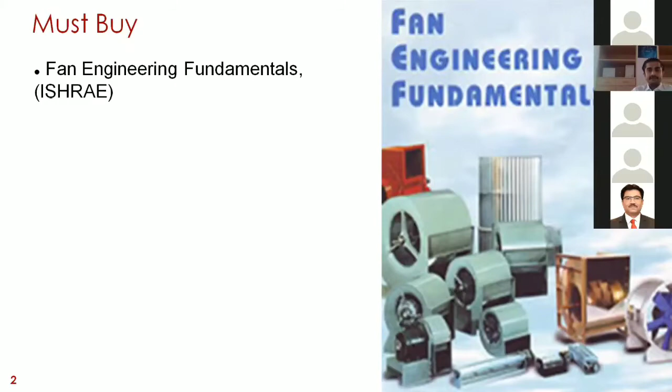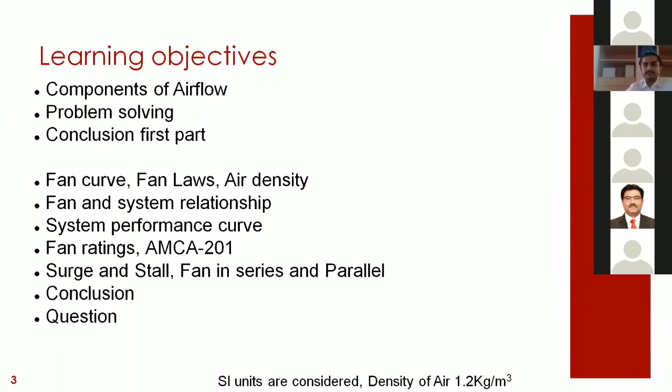So the learning objective throughout the webinar will be the components of airflow. One of the problems available within this book, I will try to solve here, so keep ready with your calculator. We will understand fan curves, fan and system relationship, system performance curve, fan rating, water surge and stalls, and thereafter we will take questions. If you have any specific question, place it in the chat box. We will try to keep this session interactive.

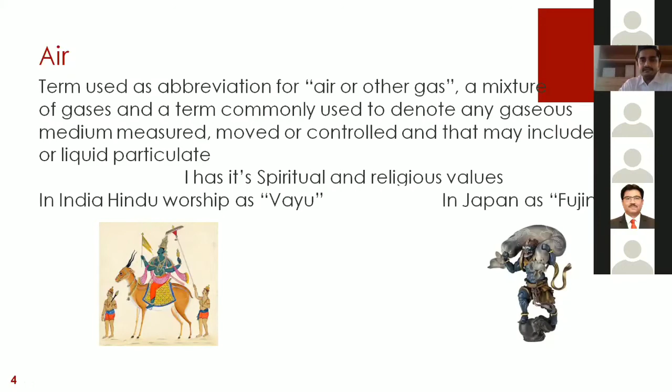So what is there - term used, abbreviation, air or other gases, a mixture of gases, a term commonly used to denote any gaseous medium measured, moved or controlled, which may include liquid particles. It also has spiritual values. In India, we named it Vayu, whereas in Japan it is referred to as Fujin.

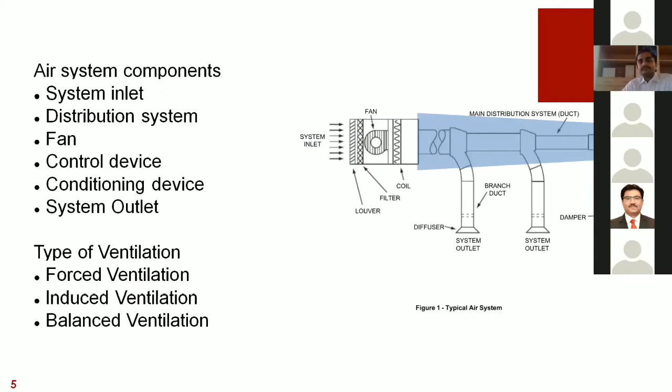So what are air system components? In HVAC, the air system components include one system inlet, a distribution system which are ducts, elbows, we have a fan placed in between, we have control devices like volume control dampers, and we have a conditioning device which will filter our air and keep the temperature low or high to the delivered area.

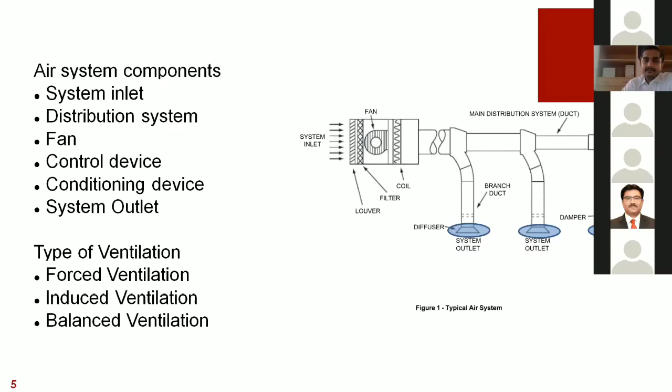There are three types of ventilation as we have all gone through - forced ventilation, induced ventilation, and balanced ventilation. We have a system outlet like grill diffusers which finally feed air into our conditioned room.

Air plus fan, a system and application area. Fan, as per AMCA specifications, is a device that uses a power driven rotating impeller or impellers to move air. The internal energy increase imparted by a fan to air is limited to 25 kilojoule per kg, approximately equivalent to a pressure of 30 kilopascal.

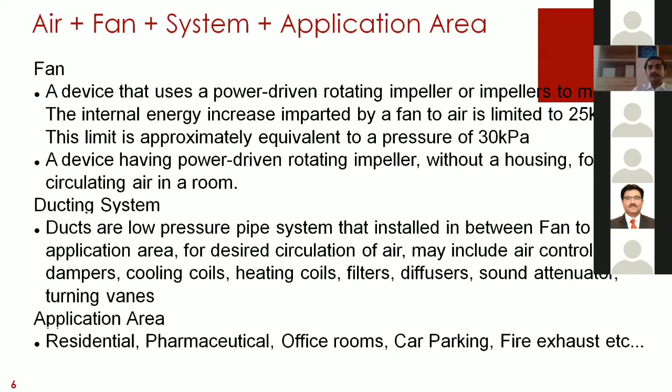Ducting system: ducts are low pressure pipe systems installed between the fan and application area for desired circulation of air. They may include air control dampers, cooling coils, heating coils, filters, diffusers, and sound attenuators. Our industry application areas are like residential, pharmaceutical, office rooms, car parking, and fire exhaust.

What are the components of air? Airflow: one is velocity of air, another is the cross-section area at the measured velocity point. As we all know, volume flow equals area into length, and here we have a velocity which is covering our length. So volume flow in airflow, denoted as Q, equals area into velocity.

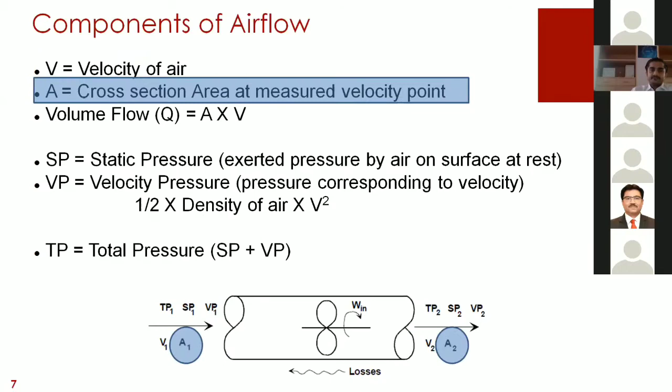Static pressure is the exerted pressure by air on the surface at rest. Velocity pressure is the pressure corresponding to velocity, with formula half into density of air multiplied by velocity square. Total pressure equals static pressure plus velocity pressure.

We have another hidden thing, which is losses. Losses are the sum of static pressure losses due to friction, shock dissipation, or velocity pressure differences between the entry and discharge opening of an air system. The system pressure losses are total pressure losses.

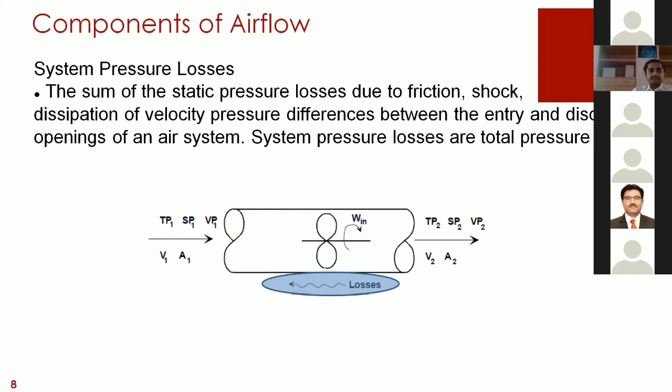So why do we need to calculate area? First, let us clarify the calculation of area. If we are measuring velocity in a rectangular cross section, then width into height is our area. If measuring through a circular cross section, then pi by 4 diameter square is our area. Generally the unit is square meter or square feet. Throughout the presentation, I will try to keep SI units because I am convenient in that.

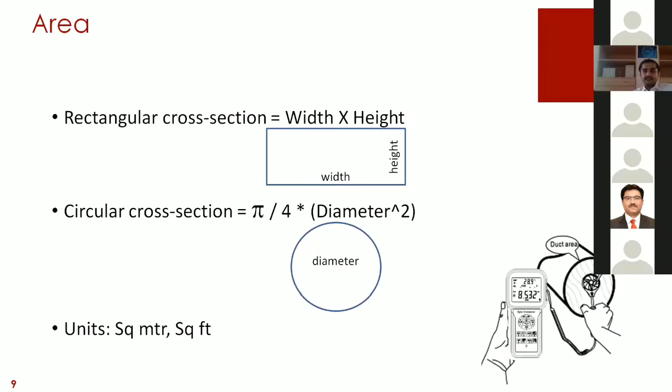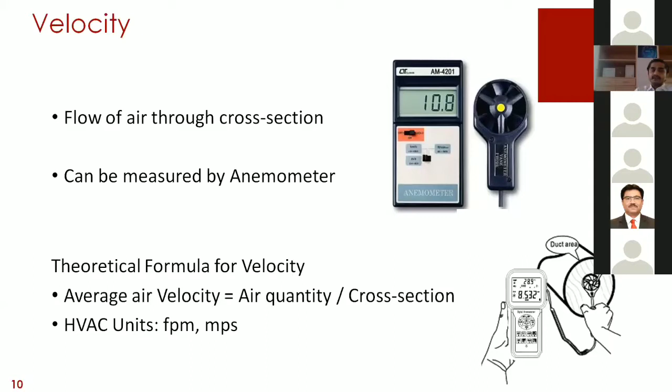So how is velocity of air measured? It is measured through an anemometer, one photograph of which I have shown here, or flow through a cross section area. Once we know the cross section, the theoretical formula is average air velocity equals air quantity divided by the cross section area. Its HVAC unit is feet per minute or meter per second, which we generally use in industry.

So how do we calculate air quantity? As described earlier, air quantity equals average air velocity multiplied by area. It comes in three different units. One is CFM, cubic feet per minute, which equals feet per minute into square feet area in the cross section we are measuring. If we have meter per second, then we multiply by the square meter area and multiply by the factor of 3600. Do we all know why 3600?

Because 1 hour equals 3600 seconds. CMS is cubic meter per second. 1 CFM equals 1.7 CMH, and 1 CMS equals 3600 CMH.

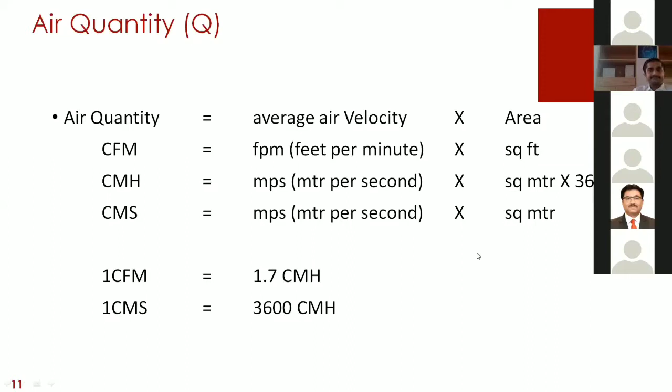So what is static pressure? Static pressure: whenever there is a flow, it's the pressure and resistance to flow, equal in all directions, can be positive or negative, independent of air velocity, measured by a pressure tap perpendicular to the airflow.

In the image you can see the measurement of static pressure in a piston arrangement. If we are not exerting any pressure on the piston, the pressure in the manometer is 0. If we exert some pressure, there will be a positive chamber reflected in our manometer, and if we pull back the piston, there will be negative pressure, which can again be visualized in our manometer. So this is static pressure.

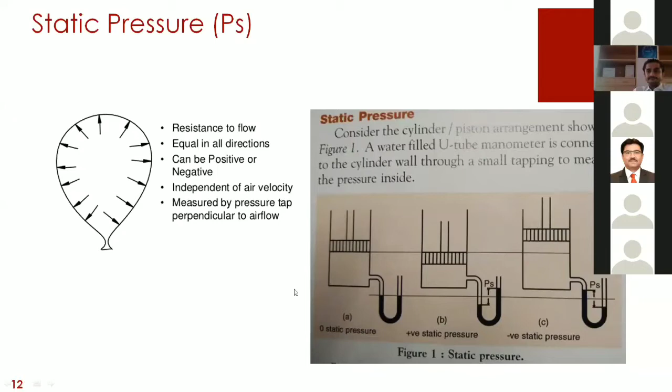Velocity pressure, as by formula, will always be positive. Velocity pressure equals 0.5 into density of air into fan outlet velocity in meter per second square, and the resultant value is in Pascal. Can anyone suggest why velocity pressure will always be positive? I'm waiting for you all.

As we all know, the square of any negative number will be positive. We had a good response because it's in the direction of flow. So in velocity pressure, by formula, it is the square of our velocity, so it will be positive always.

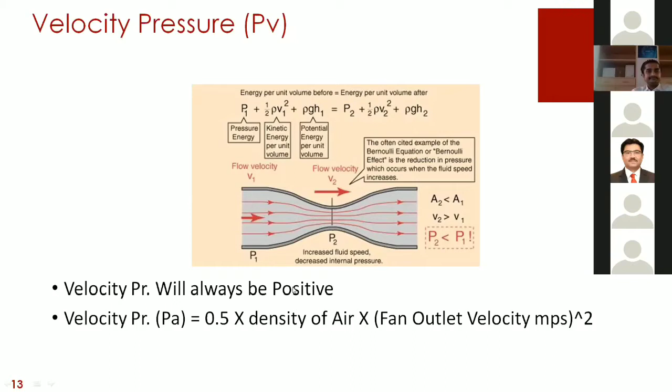Total pressure equals static pressure plus velocity pressure, by formula. In this arrangement, we can see there is a fan in between a system. There is some system resistance from the suction side, and some system resistance at the discharge side. So total pressure equals static pressure and velocity pressure.

PT equals PS plus PV. PT1, considered at inlet, will be minus because of vacuum at this side, so minus PS1, plus PV because velocity pressure will be positive. And PT2 at the fan will be plus PS2 plus PV. Its unit is inch of water gauge, which equals 25 mm water gauge, and 9.81 Pascal equals 1 mm of water gauge.

I keep one problem for you. If you have a calculator and notebook, there is one problem. Let us put some values into the system as shown in figure 2. Assume we have a duct of diameter 500 mm. For the whole duct length, average velocity within the duct is 9.9 meter per second. The duct contains system elements like filters, coils, dampers, diffusers, etc.

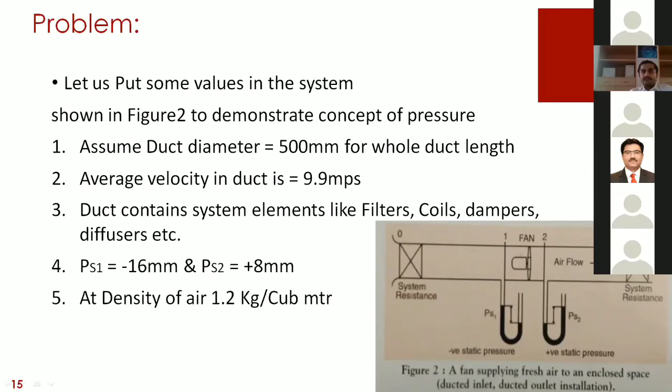PS1, the pressure at point 1, static pressure is minus 16 mm, and PS2, the pressure at the supply side, is plus 8 mm. The density of air we are keeping is 1.2 kg per meter cube. Now what we have to solve: what is the airflow, what will be the PV1 value, PV2 value, PT1 value, PT2 value, fan total pressure, fan velocity pressure, and fan static pressure.

As we are running short of time, we'll keep 3 minutes for this. You can solve it and put your answer in the chat box.

Hope you all are solving and you know how to calculate the area of a circular 500 diameter duct. 1.94 cms. Great.

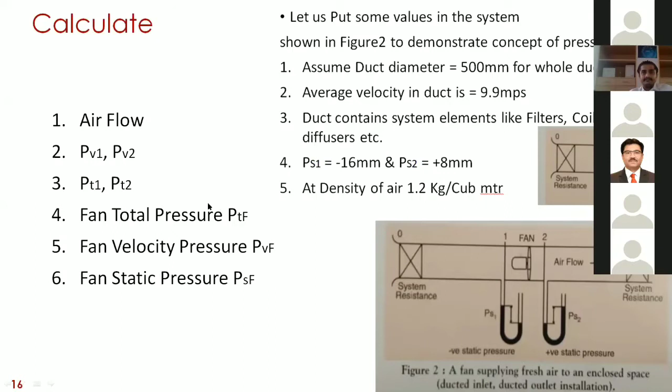So shall we move forward? Our duct area is 0.196 square meter. Great, Nirav, you got the right answer. That is 1.944 cms, which equals 7000 cmh, which will equal 4130 cfm.

Velocity pressure from the formula we can evaluate - it comes out to be 58.8 Pascal, which is 6 mm water gauge. For PT1, because we have 6 mm, so minus 16 plus 6 gives us minus 10 mm total pressure at terminal 1. At terminal 2, we get 8 plus 6, which comes out to be 14 mm. Total static pressure generated by the fan will be 18 mm, and total pressure generated by the fan will be 24 mm, because 18 plus 6 is 24 mm.

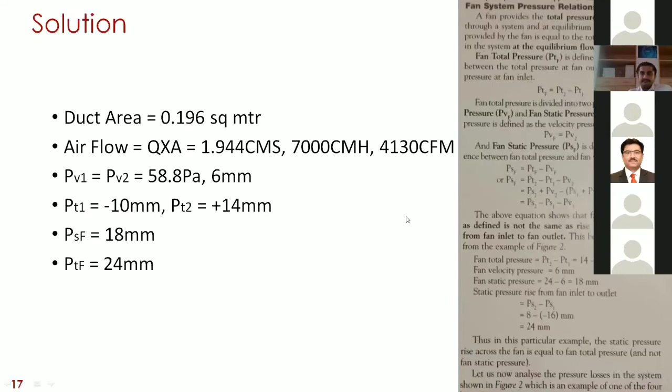So again, in components of airflow, what is fan efficiency? Efficiency of anything is output divided by input - the ratio of useful energy provided by the dynamic application to the energy supplied to the system at a specific point of operation. Total efficiency of a fan in SI units is CMS multiplied by the total pressure divided by the power consumption by the fan in watts. Or, power consumption by the fan equals CMS into total pressure divided by the fan total efficiency.

So I have created a system in which both fans are flowing 10 cubic meter per second at a static pressure of 400 Pascal, which is our system pressure drop. But velocity pressure in case 1 is 135 Pascal generated by the fan outlet, and in another case is 62 Pascal. So the total pressure is 535 and 462 in different cases.

Keeping the efficiency of both fans at 70%, there will be a drastic change in power consumption. The fan having high velocity pressure is consuming 7642 watts, and the power consumption at the low velocity pressure fan, at a velocity of 10.2 meters per second, is 6600 watts, because the duct area we calculated is 816 by 816 for the higher velocity pressure fan, and the duct area for the lower velocity pressure fan is 990.

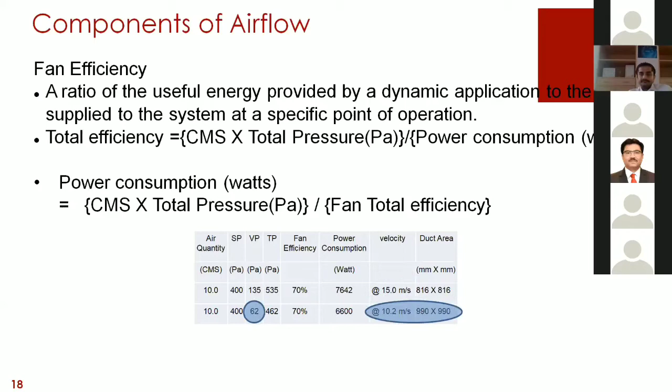There is one terminology besides fan in ducting - we can set up a static pressure regain. As we all know, velocity pressure is half the density into velocity square.

So in a system where initially the duct, or a fan, is delivering at 15.3 meter per second, by doing a transition - increasing the cross section area of the duct - the velocity is reduced to 7 meter per second, keeping an area of 0.5 and 1.1 at another end. So we can see that we have reduced our velocity pressure from 140 Pascal to 29 Pascal.

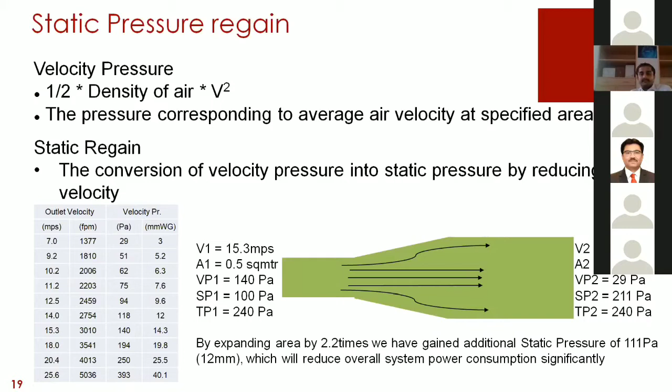Static pressure regain: initially it was 100 Pascal and we regained 211 Pascal. So the total pressure of the system remains the same, at 240 Pascal to 240 Pascal. So by expanding the area by 2.2 times, we have gained additional static pressure of 111 Pascal, which is equivalent to 12 mm water gauge, which will reduce our overall system power consumption significantly.

Conclusion so far: every flow has some velocity. Do we all agree with this? We cannot keep velocity at 0 because we need some flow.

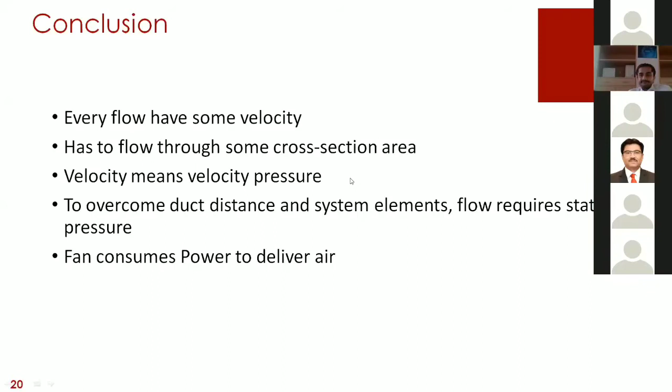So now here is the second part of the presentation. What is fan performance curve? Let us understand fans.

Fan performance curve is a graphic presentation of the performance of a fan, where one or more following characteristics may be plotted against volume airflow. At x-axis, we have kept airflow, and at y-axis we have kept static pressure and total pressure. This blue curve represents our total pressure. This pink curve represents our power consumption. Green represents fan static efficiency versus fan total efficiency.

This is at a constant density and at constant fan rotational speed.

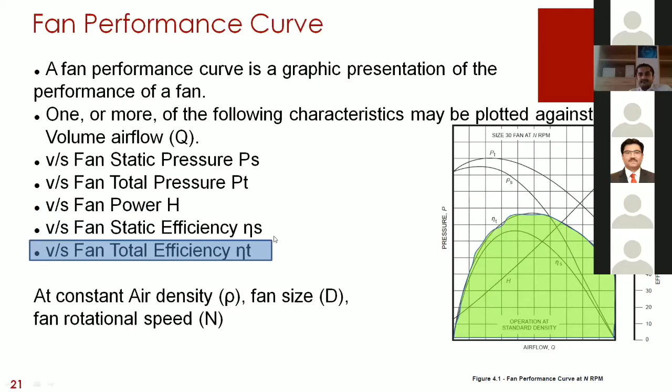So how do we evaluate our fan performance curve? We have created a system or a testing rig where we installed our fan, and at point 1 we kept a complete closed shut off point. So in the fan, there will be no flow, but a static pressure will be there.

At the second point we open our damper. Some restriction was there, we have some flow and we measured that flow with a static pressure. We plot the second point. Thereafter the third point at less restriction, fourth point at fully open. And the fifth point, which is interpolated or through an auxiliary fan, can be evaluated because the fan is mounted on some system which is also having some resistance. So this point is evaluated, or an auxiliary fan is used to generate this point at free flow.

Hope you all have understood what is fan performance curve, because this is very critical in the selection of a fan, and helps in good installation of a system.

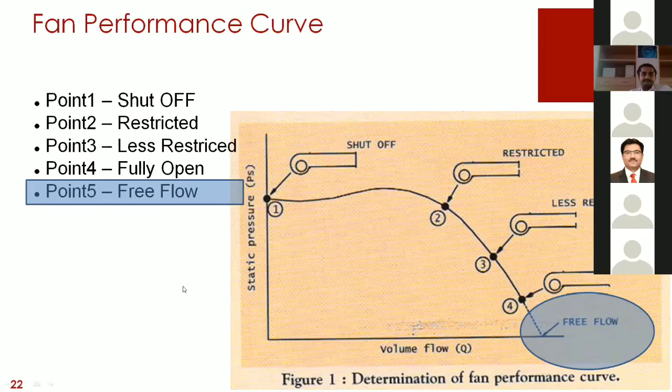Characteristics of a ventilating system. If we go into the characteristics of a ventilating system, because of the nature of the duct system and high velocities, the flow in a ventilating system is characterized as turbulent, and the pressure drop across the system element or a straight length of duct is proportional to the velocity pressure.

Pressure losses in a duct are proportional to the velocity pressure. So delta P is directly proportional to PV, which we keep equal to K equals to PV. And as we have now learned, the formula of PV, velocity pressure, is 0.5 times the density into velocity square. So our requirement of system pressure is directly proportional to the square of the velocity we are feeding into it.

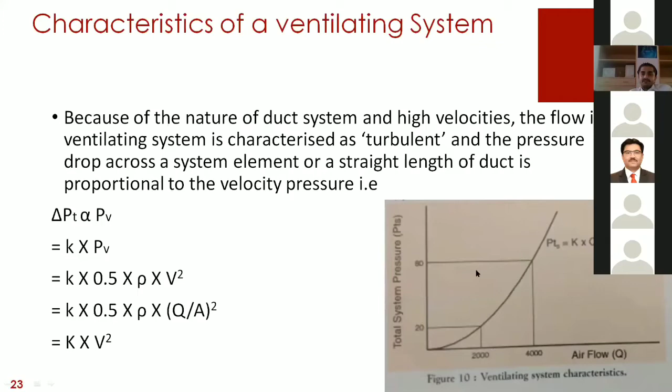From this curve, you can evaluate that if a fan is at 2000 air quantity and at 20 static pressure, and if we increase our flow in the same system from 2000, if we double our flow, then our pressure requirement within that system will be 4 times of that.

And this characteristic of a system is represented as a system curve. So here we can see an example of 3 different systems. This is 100% of a desired flow at 100% of a pressure.

But instead of 100%, if we are feeding only 50%, then our pressure requirement reduces to 1/4 times. And if we increase, say our flow increases by 20%, then our static pressure requirement will go up to 144%.

And if we have a different system, suppose if we have installed a fan or ordered a fan from a manufacturer considering a system A, but our installed condition has changed and static pressure requirement has changed, or additional static pressure is required, then our fan will behave like system B.

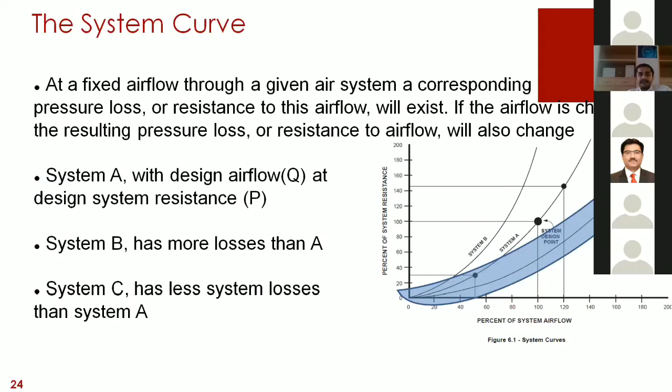And if in the installed condition the pressure drop is less, then the fan will behave like system C, which has fewer system losses. So we can understand the interaction system of a fan curve is composed of fan characteristics and system characteristics.

Point 1 is our desired point, and if the actual installed system is identical to our calculation, then the fan will deliver the performance 100% as desired. But instead, if there is additional pressure, meaning system B, we ordered a fan considering system A, but our installed system has additional load requirement, then the system will shift itself to point 2 and there will be a lesser amount of air delivered through the fan.

Or instead of system B, if our installed system is like system C, which has a lesser pressure requirement, the fan will give an additional quantity of air as desired.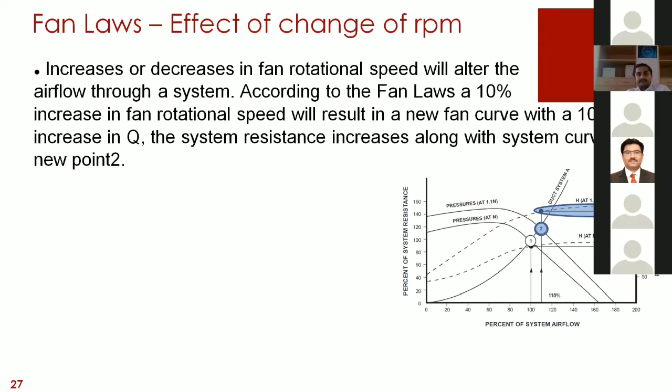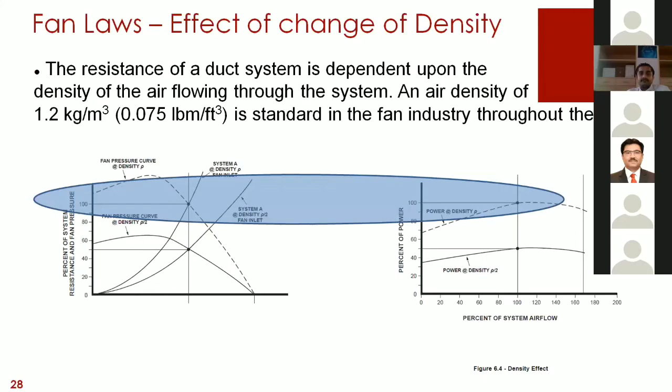Same is the case with density. If we have a fan installed at higher altitude or at higher temperature, then power consumption required is less. In colder areas, cold rooms, or refrigerating rooms, the power consumption will be high because of the higher density of air.

So recall fan laws again. What are the different types of fans used in HVAC industries? Axial flow fans, centrifugal fans, axial centrifugal fans which are plug fans, some roof ventilator fans, new technology cross flow ventilators found in our air curtains, and vortex or regenerative fans are also there.

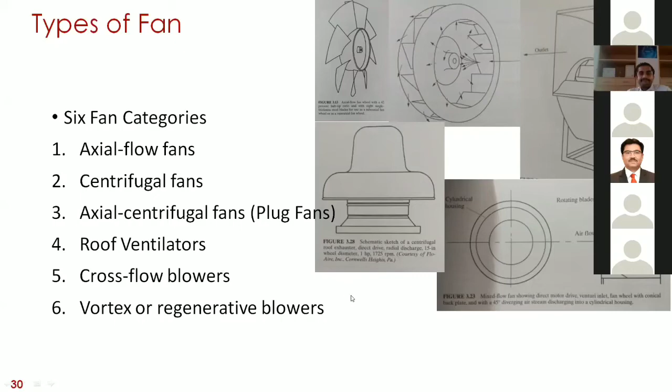Some performance comparison and characteristics of a fan. These performance characteristics I am discussing are available on Google, but I recommend to all users that although these comparisons are indicative purpose only, because nowadays designers and manufacturers are designing new concepts of fans, high efficiency fans. So don't rely on these parameters only and don't make your thumb rule on the basis of this. It would be better if you ask a manufacturer whether he can provide a solution for this kind of installation or not.

Axial flow fans generate less pressure, up to 40 mm water gauge, occupy less space, but are noisy and economical. In comparison, centrifugal fans deliver the desired pressure because we can modulate its RPM; they occupy a big space and are less noisy, but costly. Plug fans deliver desired pressure, occupy somewhat middle size space compared to axial and centrifugal fans; they are less noisy, but costly too.

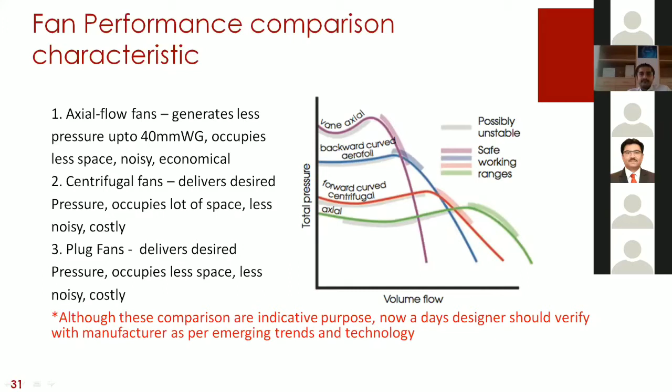Let us understand what axial fans and vane axial fans are. Axial flow fans operate on the principle of deflection of airflow by the fan blade. The pressure is produced simply by lift as the blade rotates and air moves over it. These can be fire rated. Guide vanes help boost static pressure and efficiency of a fan. Performance depends on the manufacturer's design. It occupies less space and it is economical.

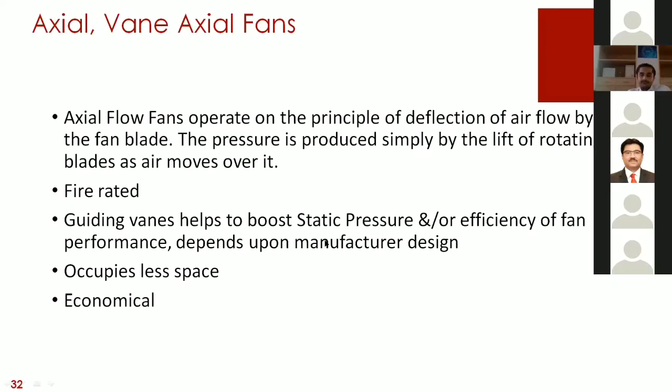These are backward curve fans, as the name suggests, but these are centrifugal fans. The difference between an axial fan and a centrifugal fan: in an axial fan the airflow direction is along the axis of the fan, while in a centrifugal fan the centrifugal action of air is used, suction side of the fan inlet is from this side and the discharge side is like this.

So why backward? Because of the rotation of the RPM of the fan, these fan blades are inclined towards the left side of the impeller. Impeller blades are inclined away from the direction of rotation. As a result, the tip speed of air leaving the impeller is less than the wheel peripheral speed, and the resultant volume is much lower than the forward curve.

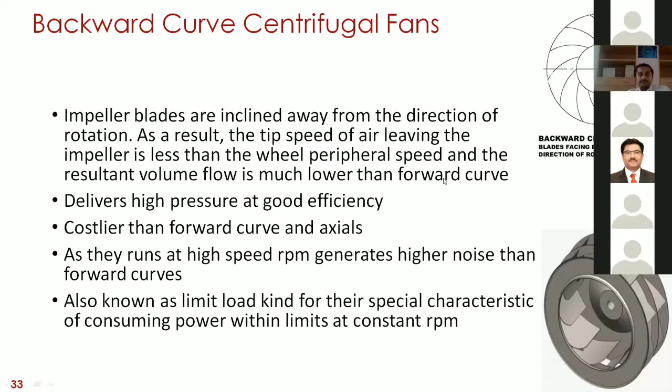It delivers high pressure at good efficiency, but is costlier than forward curve and axial fans. They run at high speed RPM and generate higher noise than forward curve fans. Also known as limit load kind of fan, for special characteristics of consuming power within the limits of constant RPM.

This is the design criteria for the forward curve. As the name implies, the fan blades of forward curve impeller are inclined forward in the direction of rotation. They deliver lower pressure than backward curve, are costlier than axial fans as they run at low speed, and generate lower noise than backward curve fans. As they run at lower speed compared to backward curve for the same air quantity at the same static pressure, forward curve requires lower RPM, while backward curve requires higher RPM. They have variable power consumption at the same RPM.

Evaluation of pressure should be within range. This is a very critical point while selecting a forward curve fan - we should not over-design our static pressure while using a forward curve fan, because these fans are not limit load type. I will explain this in the next slide.

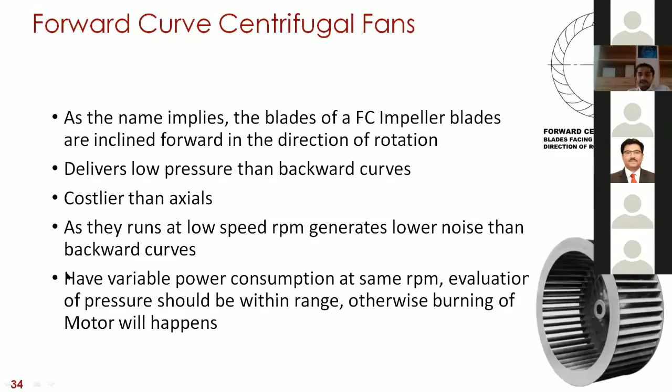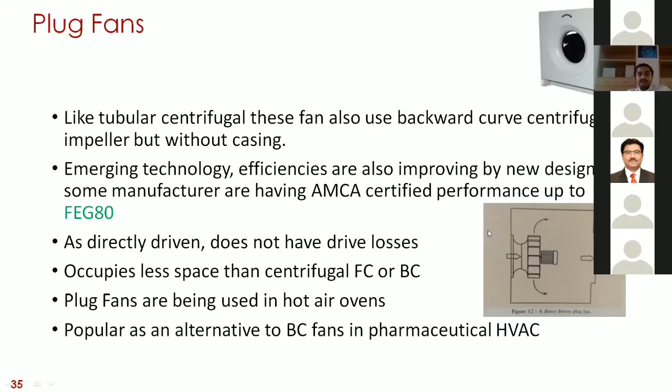Like tubular centrifugal fans, these fans also use a backward centrifugal impeller but without casing. This plug fan or plenum fan can be directly installed on a plenum where they pressurize the plenum chamber and discharge can be taken from any side. Initially there was a myth that plug fans are not efficient, but some manufacturers now have AMCA certified performance up to FEG 80. As they are directly driven, they have no drive losses, and occupy less space than centrifugal forward curve or backward curve fans. Plug fans are also used in hot air ovens, and are popular as an alternative to backward curve fans in pharmaceutical HVAC applications.

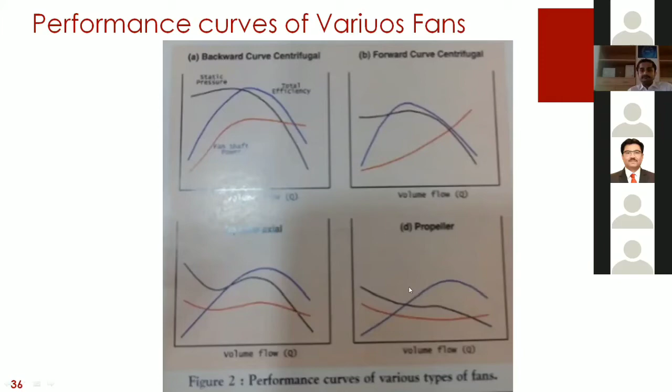Next, fire rated fans. What are fire rated fans? As is certain in our HVAC industry, if we go to basements of shopping malls or commercial offices, we find fire rated fans installed there.

These are installed with the idea of ascertaining building occupant safety in case of fire. This smoke and heat extract fan system helps with continuous smoke extraction for at least 300 degrees for 2 hours, or 250 degrees for 2 hours. They keep the escape and access routes free from smoke, facilitate firefighting operations, create a smoke-free layer, delay or prevent the flashover point - thus the full development of fire - reduce thermal effect on structural components, and reduce damage caused by the thermal decomposition of products.

I don't know about the present, but when I joined my engineering in 1999, there was one experiment in the chemistry laboratory to find the flash point and fire point for engine oil. I learned that there is a point when we heat oil, after which temperature the oil will catch fire. This happens in buildings too.

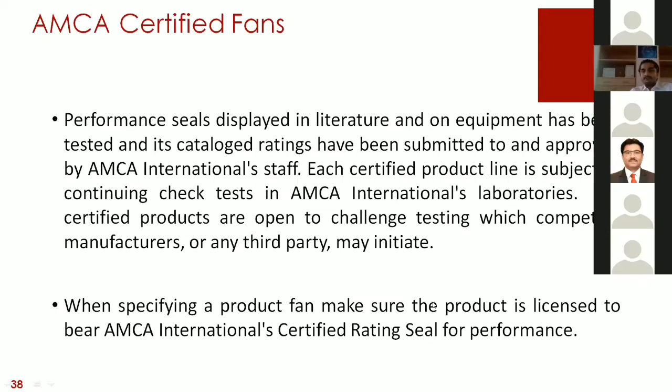So what are AMCA certified fans? In our industry we use AMCA certified fans. AMCA is one of the certifying agencies for manufacturers. The performance seal provided by AMCA on a fan ascertains that the performance marked by the manufacturer is tested in their laboratory. When specifying a product, make sure the fan is licensed to bear the AMCA International Certified Rating Seal for performance.

So what are the design and standards for the fan in HVAC in India? There is National Building Code which provides guidelines to a designer for the usage of fan in different applications like car parks, fire exhaust, and kitchen ventilation.

Air performance as per AMCA 210 provides the air quantity, pressure, power consumption and efficiency of a fan, for their certified range of products listed on amca.org.

Sound performance curve as per AMCA 300 provides the air quantity and the noise generated. AMCA 205 provides the fan efficiency, the FEG grade.

CE fire rating is based on standard BSEN 12101 for high temperature. UL rating is also there for fire rating under product category code ZAXH, for power ventilators for smoke control systems at ul.com.

Static and dynamic balancing as per grade G6.3 and G2.5.

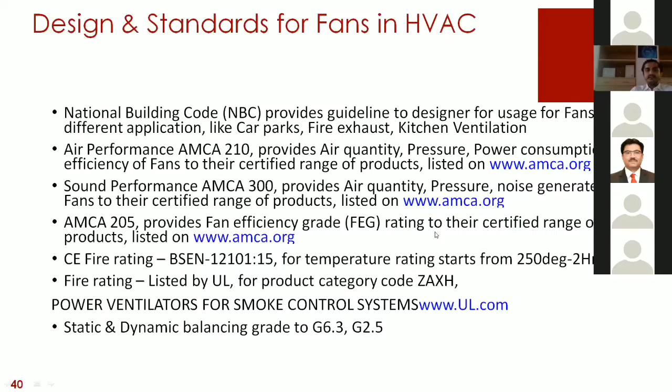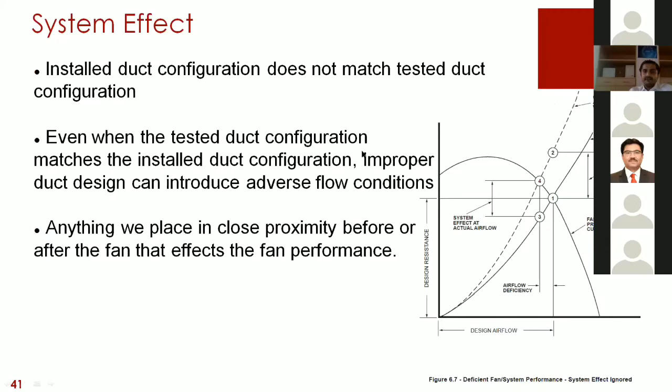There is one system effect also within the fan. System effect is when the installed duct configuration does not match the tested duct configuration. So system effect depends on the installation of the fan with its ducting. It may decrease the airflow, may cause excess noise, may require more energy. If we install our fan in the wrong way, it may cause excess vibration and lead to breakage of the fan impeller, and airflow deficiency will be there.

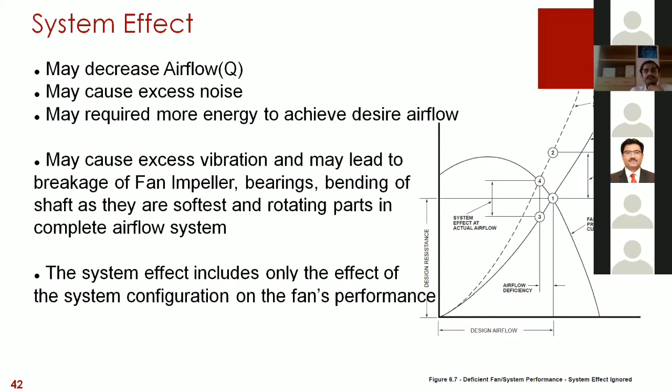I will not take much into detail. Let's not go too far for today.

And if we give an immediate bend within this region, the performance of the fan will drastically change, and the same is applicable on the inlet of the fan also.

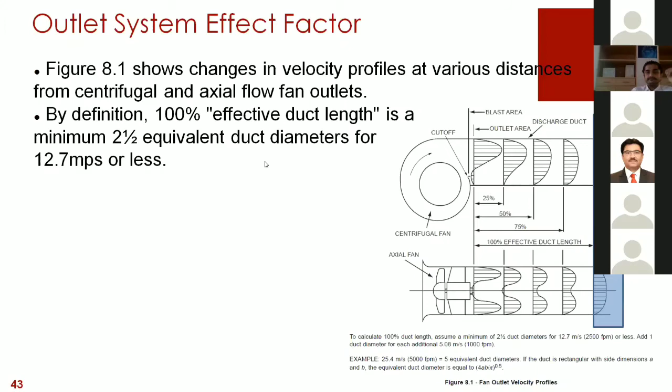In the centrifugal fan AMCA standard, we get a study on how this will affect the performance of the fan, and how much extra static pressure we need to calculate by providing an extra bend in the system.

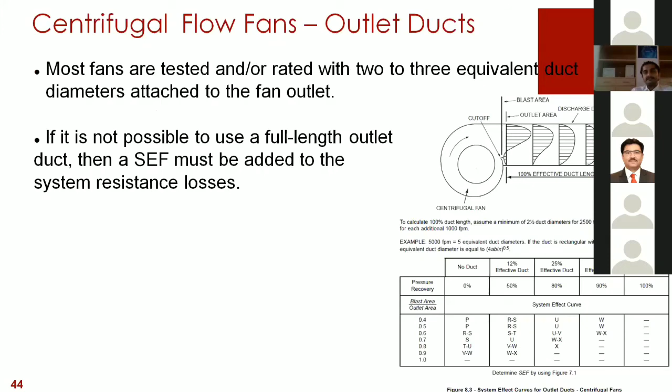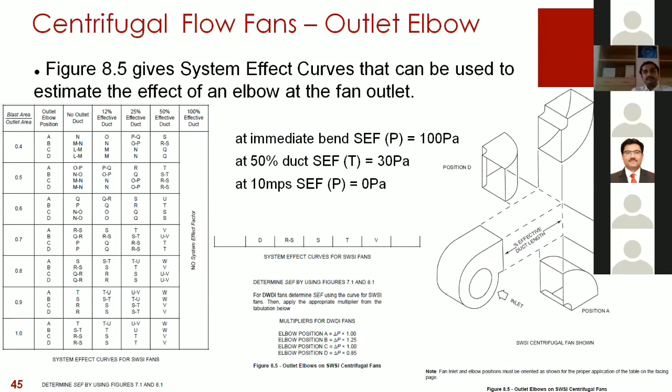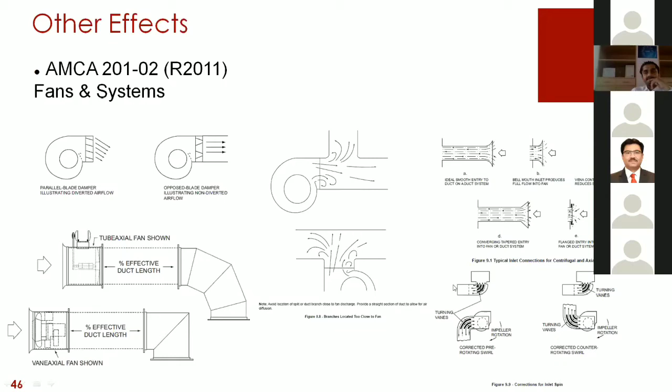Other system effects occur if we place a damper immediately at the fan mouthpiece, if we place a louver on the fan mouthpiece, or if we give an immediate additional branch on the suction side. If you can make AMCA 201 available, you will get detailed information on fans and systems, and how system effect will affect them.

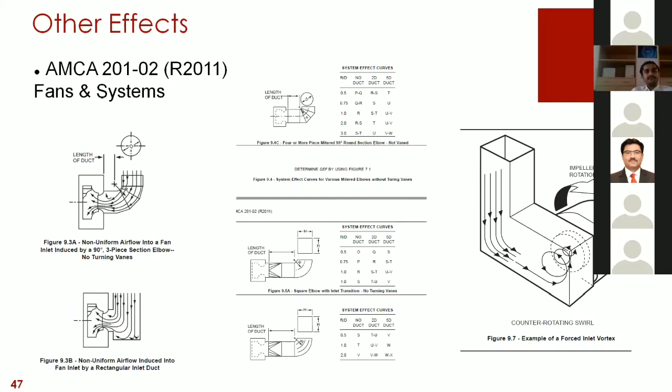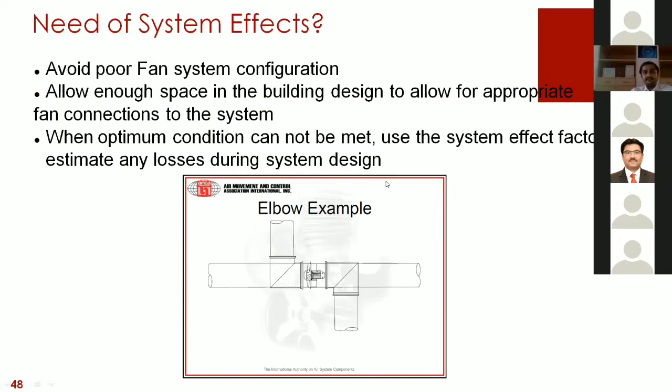The need for accounting for system effect is to avoid poor fan system configuration, and to allow enough space in building design for appropriate fan connection to the system. When optimum conditions cannot be met, use a system effect factor to estimate losses during system design. If we keep additional losses within our system design, then our fan will perform smoothly.

Here is an installation example. As we can see, the fan has a bend like this, and the immediate bend is mounted at position C, so it has a drastic pressure drop.

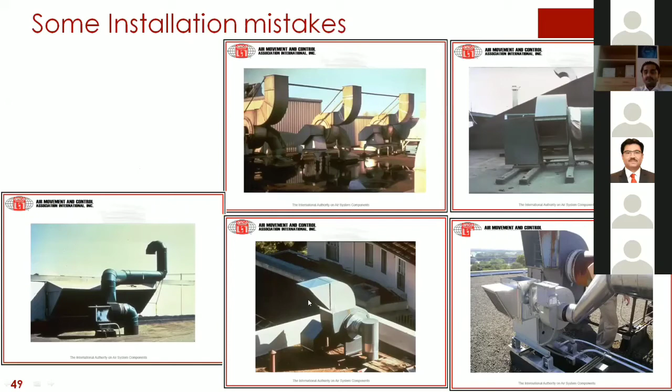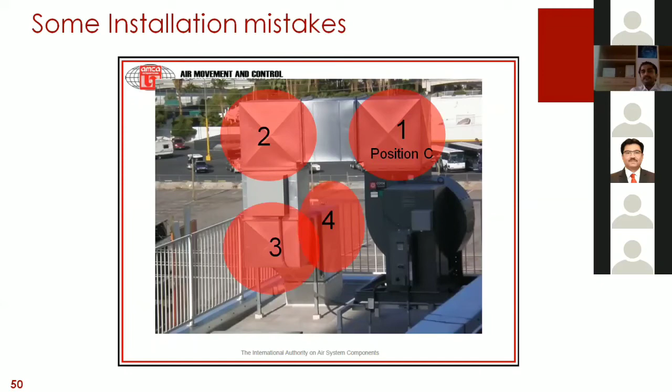This is one fan which is beautifully installed by the installer, but if we look closely, because of system effect, the fan is moving clockwise from this side, but the immediate bend is anti-clockwise. So this position 1 is adding a pressure drop, and position 2, because instead of an elbow it is a rectangular 90-degree bend, along with bend 3 and bend 4 — these all four bends are making additional pressure drop in the system.

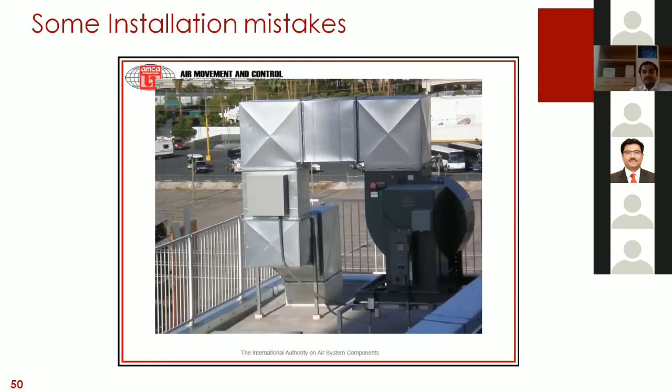So what I got to know from this image is that, however nicely the fan is installed with good aesthetic look, at position C, if we can change the orientation before installation, it will save over 100 Pascal pressure drop. And if we keep the extra length of effective duct length, then it will save over 30 Pascal.

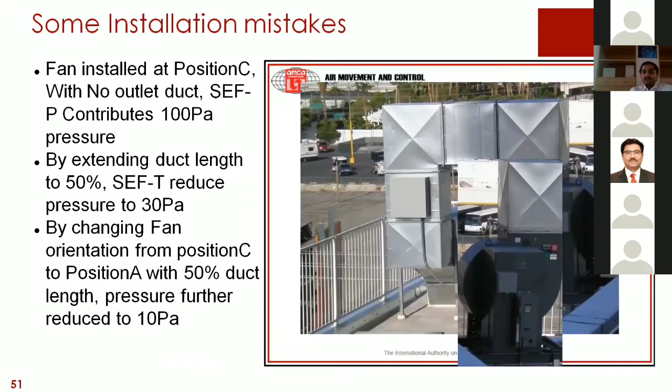So what will we do? If we don't get our performance, we will try to run the fan at a higher RPM, because of which the impeller may get damaged, or additional vibration and backfire of air through the system and all these things will damage our impeller.

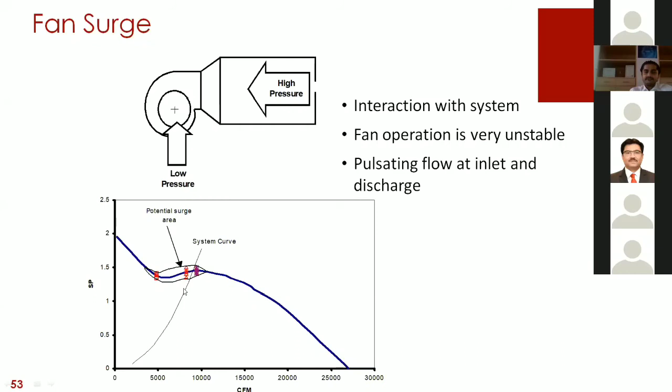So we don't select the fan, or our system curve should not lie in this fan surge area, so that we can get the best performance from a fan. When we join fans in series, our static pressure will be double that of the same capacity of a fan, two identical fans placed in series.

And when we keep fans in parallel, our flow will add and the static pressure will remain the same. But we need to understand the unstable area will also double itself.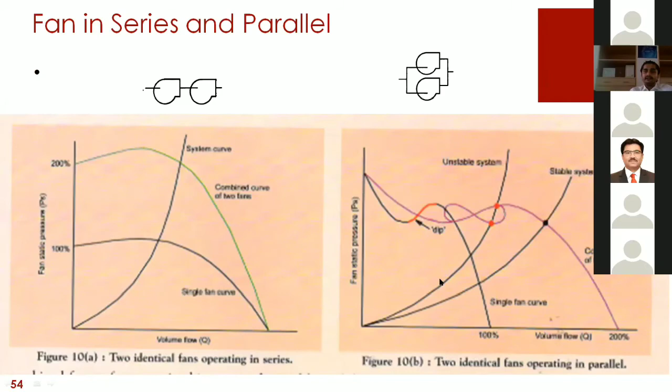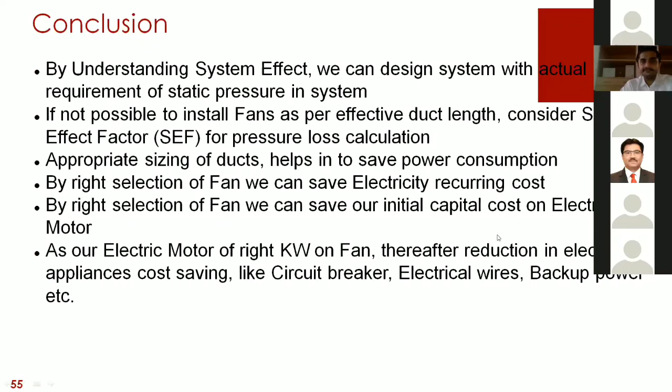Sir, one basic question: how do we decide which type of fan should be selected for which application? So the question is very basic. Yes, absolutely basic for students' understanding.

First of all, I would recommend calculating your air quantity requirement, the static pressure requirement, and the application area, whether it is heating, cooling, or some specific requirement. Then go to the manufacturer, and he will give you a good solution.